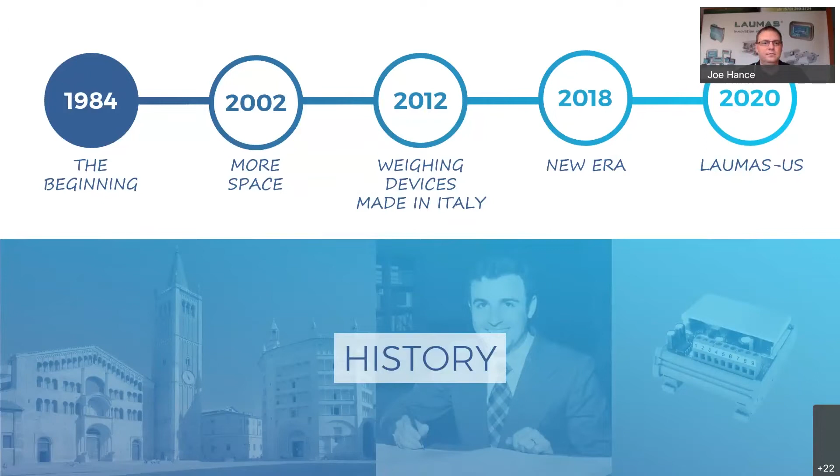In 2002, the business was moved to its current location just a few miles from Parma.

The benefits of the investments made in previous years in R&D arrived in 2012. LAUMAS completely renewed its range of products, introducing to the market new lines of very innovative, completely made in Italy weighing indicators and transmitters that immediately became a huge success.

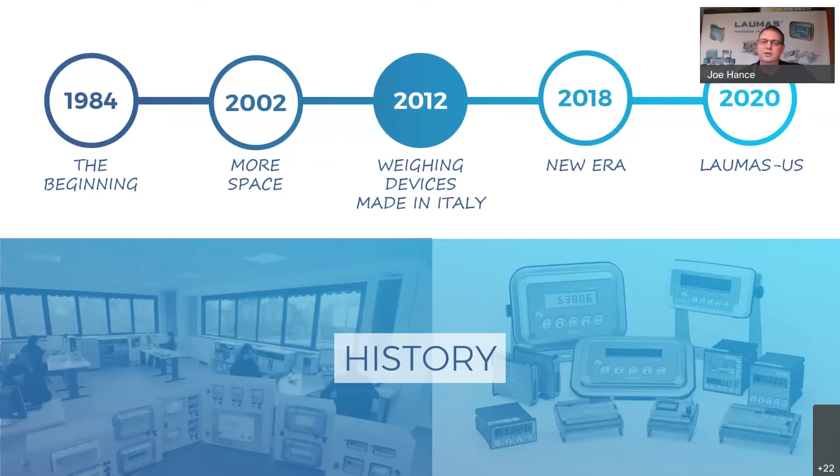In 2018, the largest expansion to date was completed. This expansion doubled the size of the facility and includes more warehouse space as well as a metrology lab.

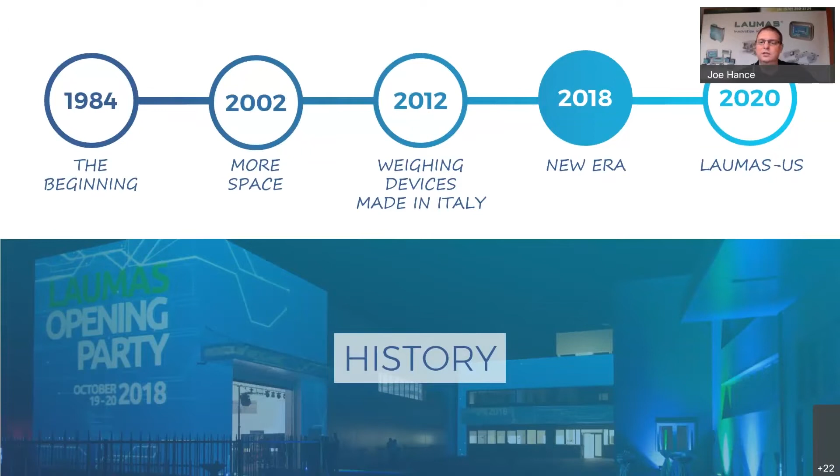The most recent news, and the purpose of this webinar, is that in 2020 LAUMAS made their physical presence in North America by creating LAUMAS U.S. The major investment in the North American market allows LAUMAS to provide timely products and services that were not possible in the past. This massive endeavor shows their commitment to LAUMAS customers in the US and Canada.

Before I get into my qualifications, I would like to take a minute and thank the entire LAUMAS team for choosing me and my team to represent them in North America. I was, and am still, honored to be selected for this role.

The reason I was chosen to lead this new venture for LAUMAS in North America by Massimo and his team is my background in our field. With over 20 years of experience in the industrial weighing sector, which involved working with people in almost every industry imaginable, I have the skills to lead our team in North America.

Some of my expertise includes vessel weighing, batching systems, crane weighing, and overload protection. I also have a lot of experience in force measurement applications.

I first became familiar with LAUMAS and their products in 2016. By this time in my career, I had spent decades working with other vendors. After testing the LAUMAS products myself and receiving excellent support from Pietro and the technical support team, I knew I had finally found a quality company to work with.

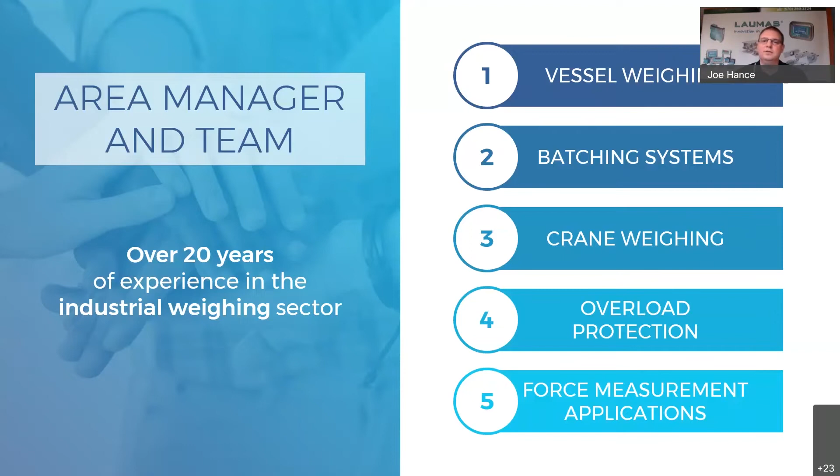We have carefully selected our North American staff with strengths in various fields. The team we've assembled in the U.S. has a vast background in sales and support.

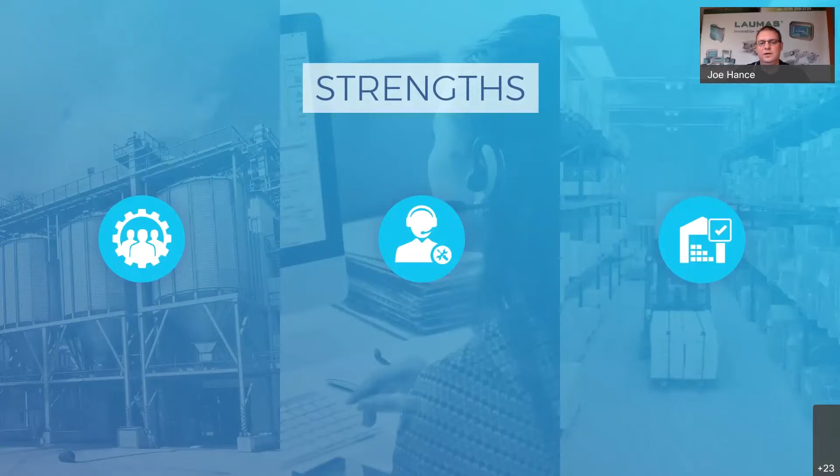Here in Pennsylvania, we can assemble pre-configured tank weighing and batching systems. Our staff performs theoretical calibrations on these systems when requested, which allows for a faster and easier setup for the system by the installer on site. We assist OEM customers with custom load cells and electronics to suit their needs, and we also offer in-house PLC and HMI programming for small automation projects.

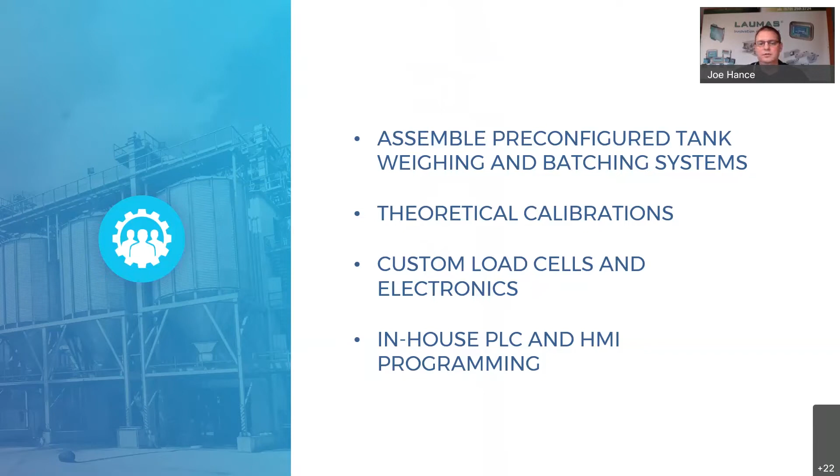The goal we have set for ourselves here in the U.S. is to make connections with partnerships with scale manufacturers and dealers, machine builders, and automation companies.

For the benefit of our North American customers, LAUMAS now has a large number of their products stocked in our U.S. facility. We have thousands of items in inventory stored in our warehouse located in Pennsylvania, and these items are replenished regularly. Having the more popular products in stock benefits our customers by shortening the lead time for delivery, and in most cases we can offer same day shipping for these in-stock items.

Another advantage for our customers is found on the LAUMAS U.S. website. Here we will find the list prices for the most popular items sold in the U.S., and these prices are in U.S. dollars. We do offer significant discounts for resellers and OEMs. We encourage you to contact us to learn more about our discount structure.

On the LAUMAS U.S. website, you'll find these products broken down into the following categories: load cells and mounts, indicators and weight transmitters, crane and platform scales, intrinsically safe weighing products, various accessories, and software to complete your scale system. Our customers can access product manuals and are able to download my favorite tool, the free Instrument Manager software. We'll talk more about this later in the presentation.

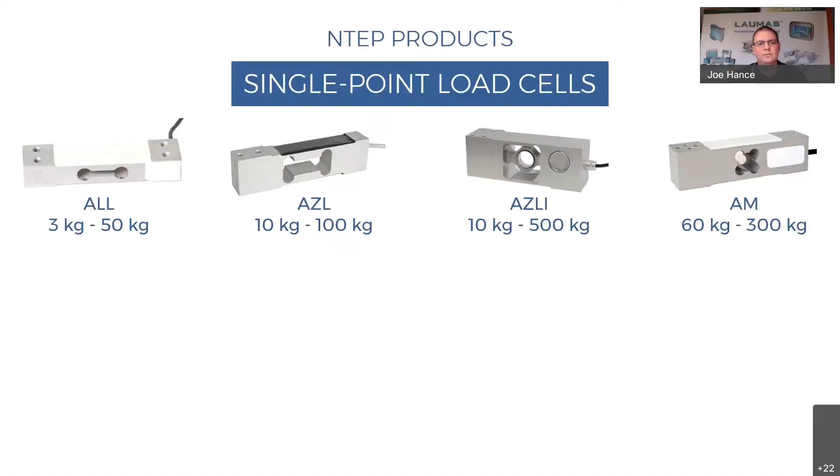As part of LAUMAS's investment in the U.S. market, we have achieved NTEP certification for many of our products. Although 95% of the applications we deal with do not require the certification, we believe this is a symbol of quality, as these products have passed intensive third-party testing.

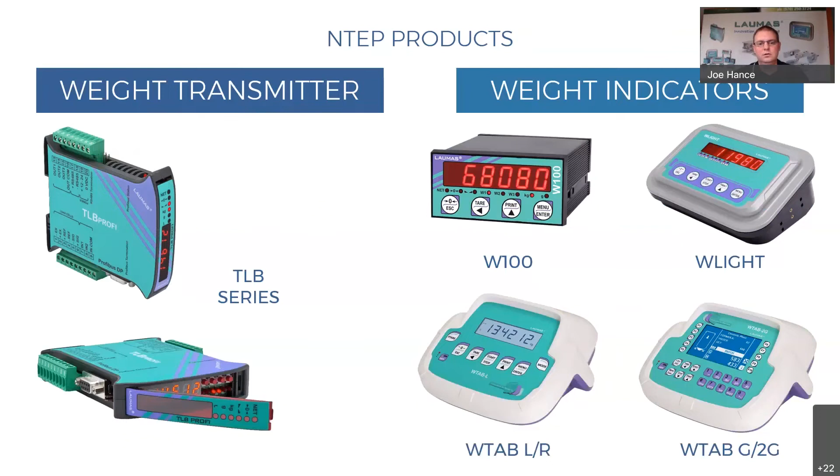We have many other legal for trade certifications for various countries and regions. We have also acquired several approvals for our products installed in hazardous areas.

For the following products shown in the next few slides, we have just recently acquired the 3A sanitary standards approval needed for many food and pharmaceutical installations. Often we are asked for products that meet the 3A requirements. Now we are able to satisfy that market.

For example, the unique design of the FLC3A load cell is not limited to use in the food industry. The price point makes it a good fit for any application, even when 3A is not required. It is easily installed on new and existing tanks, hoppers, and even conveyors.

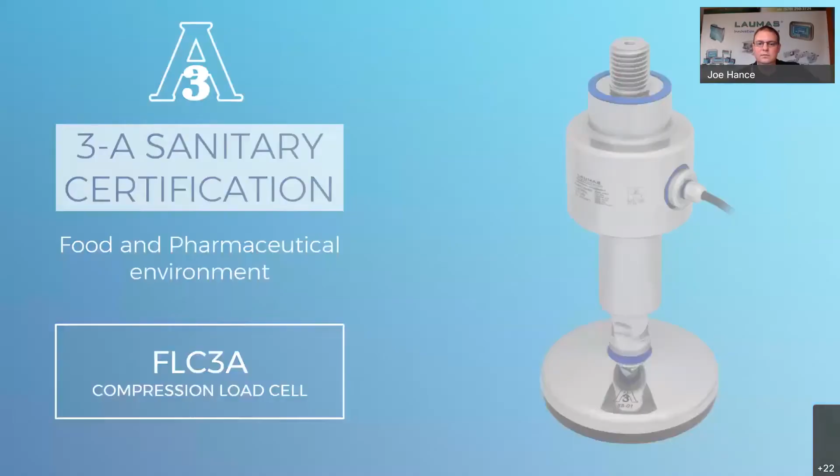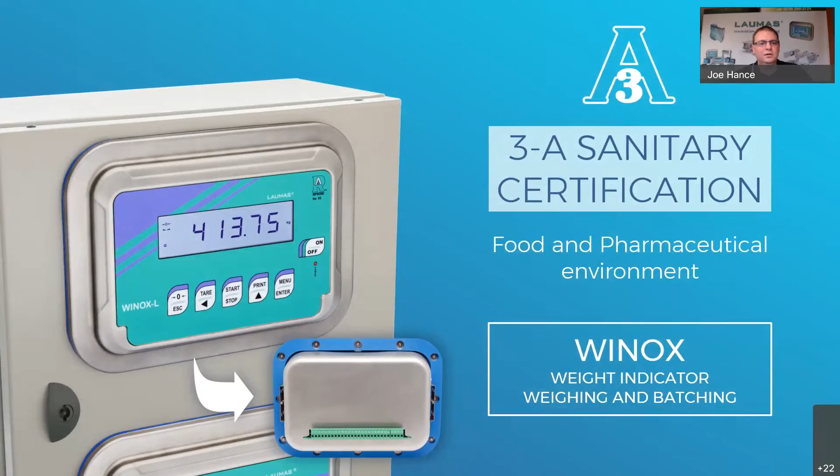We also have 3A approved versions of the popular LCB load cell digitizer, the Winox L indicator, and the TLM8 load cell transmitter.

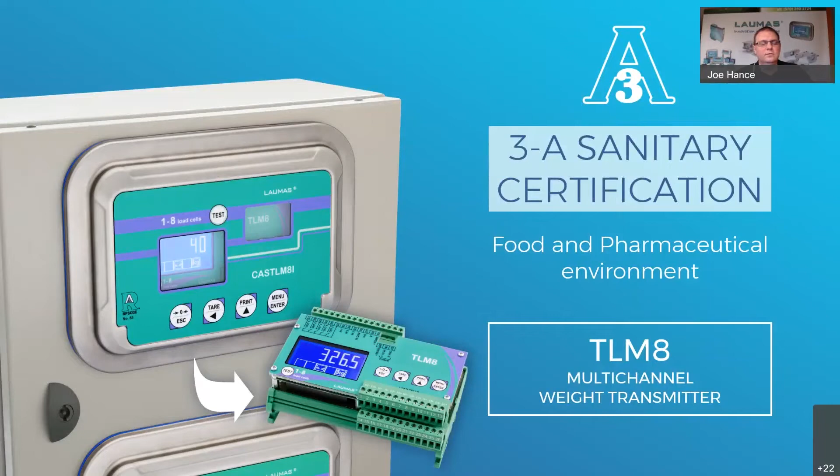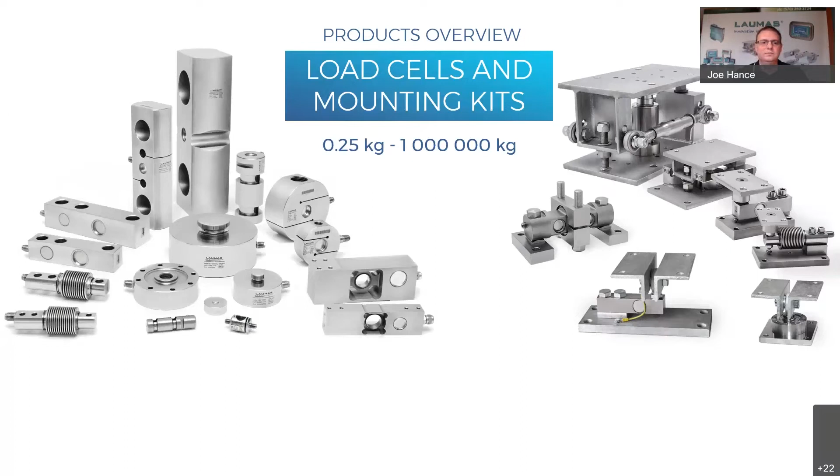We offer a full line of load cells and their dedicated mounts, with load cell capacities from 250 grams to 2 million pounds. There are standard products to satisfy most weighing requirements. For those unique applications, we can design and manufacture custom load cells such as load pins, submersible tension links, and through-hole load cells.

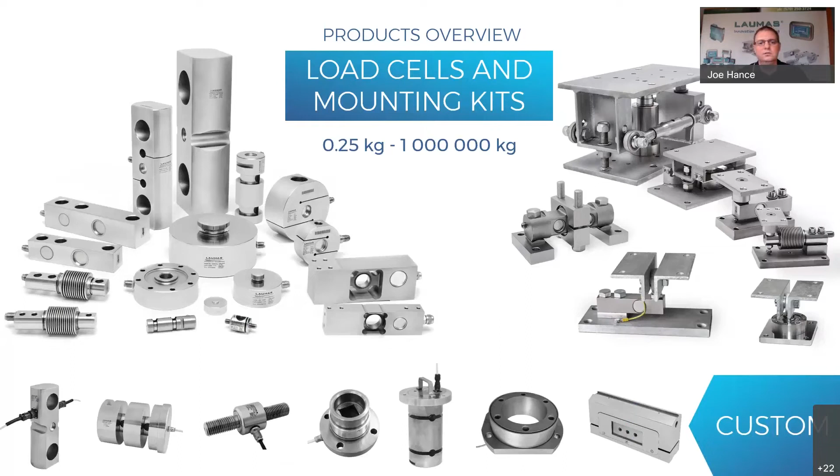Now let's look at the weighing electronics that LAUMAS offers. This, in my opinion, is where LAUMAS stands out from the competition. We offer a wide range of products from load cell amplifiers and digital transmitters, along with a complete line of weight indicators. There are single channel and multi-channel transmitters with 4 or 8 load cell inputs, which eliminates the need for a junction box.

Many of the indicators have multiple program options, such as basic weighing for simple weighing functions. For more complex weighing situations, there are modes for load, unload, and 3, 6, or 14 ingredient batching programs.

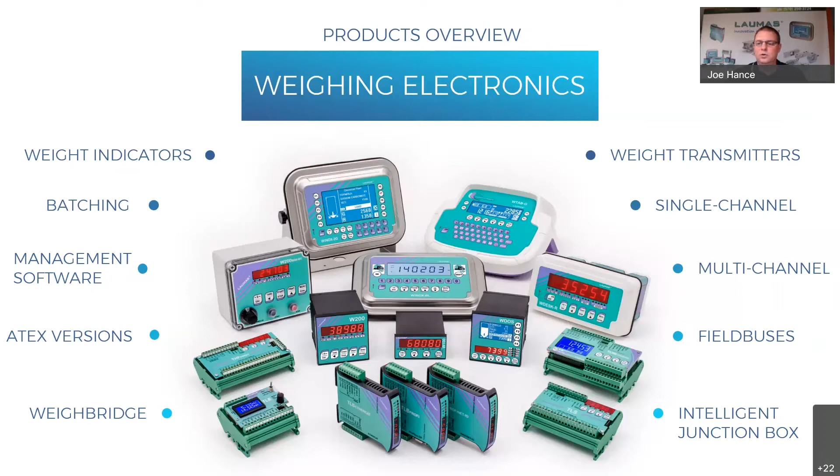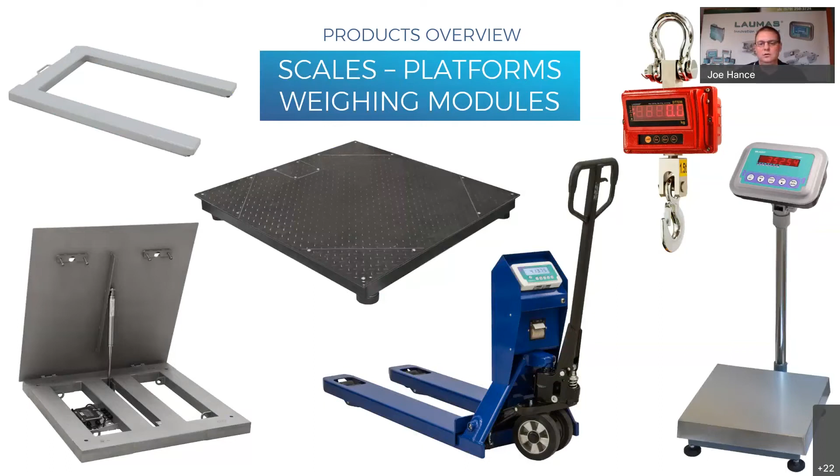Now I'd like to take a little time introducing you to a few of the products that are my personal favorites. Creating a small list of favorites to highlight was difficult, but the items that I'm going to go over with you seem to be some of the most popular.

Let's begin with my favorite tool, the Instrument Manager software. This program is provided for free and allows setup and calibration of many of our weighing indicators and transmitters. You can also perform firmware updates to the instruments and even save the configuration calibration file for later use. This feature is useful if a unit fails for some reason. It gives the user the ability to upload the saved file to a new instrument and continue on without the need for recalibrating the scale.

Next is a couple of load cells and mounting assemblies that we see a lot of. The first is the V10275 mount used with the CBL compression load cells. The key selling point and why I prefer these mounts is the ease of installation of the load cell after the mount is already in place. The jacking bolts allow easy load cell replacement if needed. Compared to the commonly used mounts for double-ended beam load cells that are difficult to replace the cell, the V10275 is much more user-friendly. This is the mount assembly I choose for medium and high capacity tank weighing systems.

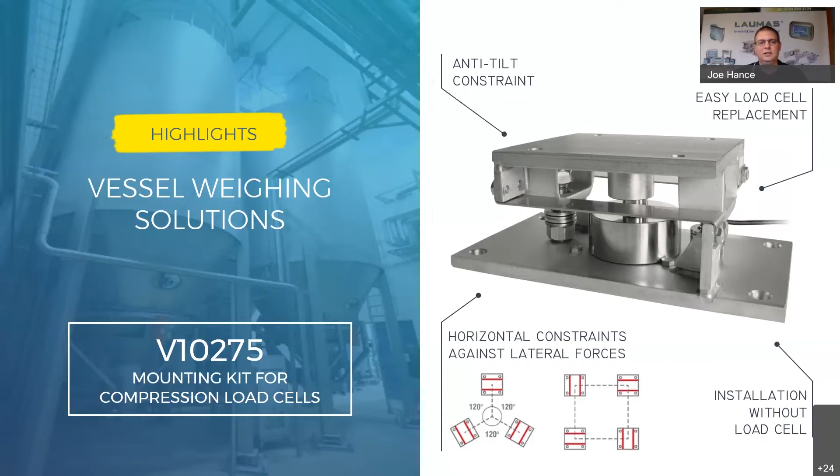Next is the TFC GP using the FCOL bellow beam load cell. The load cell is designed for washdown areas. The mount is stainless steel with rubber isolation for the top plate. This compensates for slight misalignment issues and helps with reducing the effects of vibration on the weight reading. I choose the TFC GP for small to medium vessel weighing and when weighing a small conveyor section is needed.

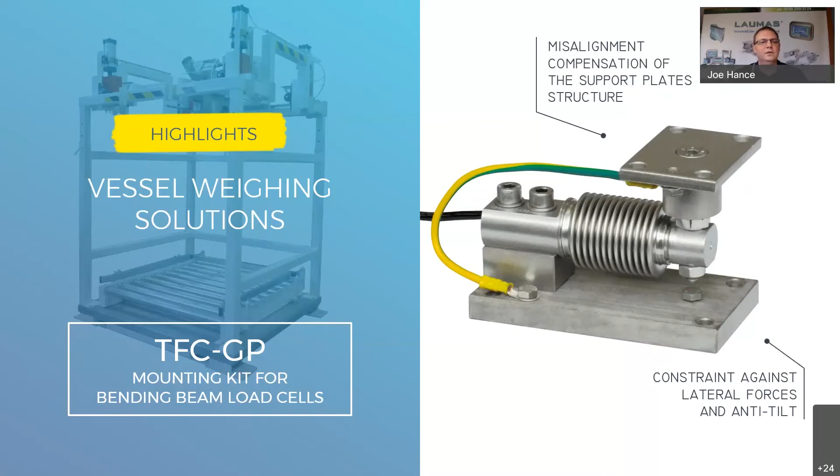This brings us to the WLIGHT weight indicator. Used for basic weighing applications, its low cost is ideal for bench and floor scales. This model can be run on batteries or AC power. This feature is what makes the WLIGHT so popular.

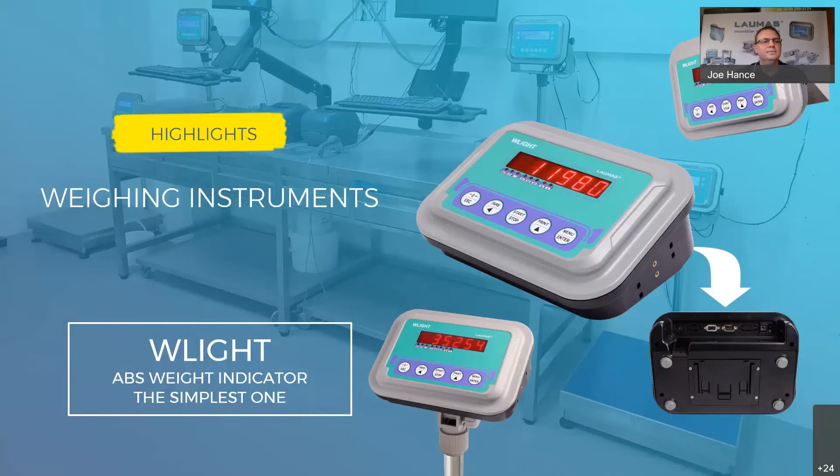Here is the WINOX2G Advanced Weight Display. The large LCD graphical display gives the operator important details about the weighing operation. Available programs include filling and dispensing to a set point, and multi-ingredient batch weighing, with versions for 3, 6, or 14 ingredient processes.

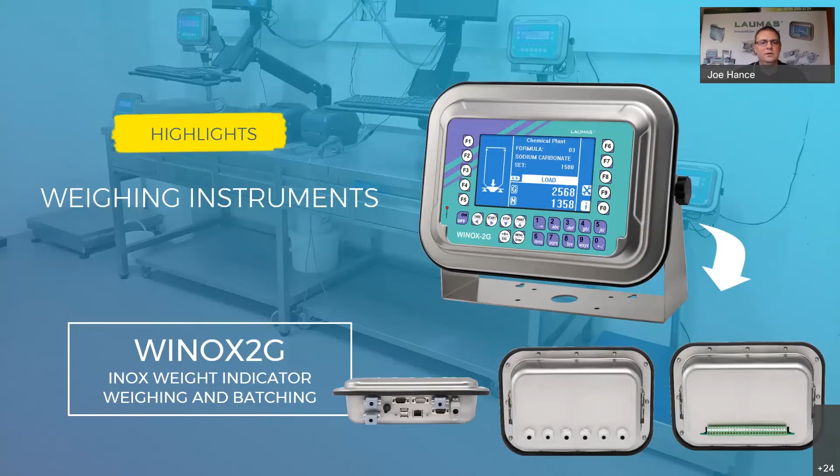Now we're on to a couple of the most used load cell transmitters. The single channel TLB is probably our best seller, and is also one of the most private label products we manufacture. It's very cost effective, making the TLB popular with OEM and system integrators when a PLC interface is required.

Next is the TLM8. It is an 8-channel weight transmitter, having all the same features as a TLB and then some. Analog output is a standard feature along with RS-485.

The test button on the front panel is my favorite feature of this model. This allows quick access for a technician to see the individual load cell's outputs. To give you an example, this information is extremely useful when installing a tank on load cells to see if the load is evenly distributed, as well as verifying the load cell's integrity while in use.

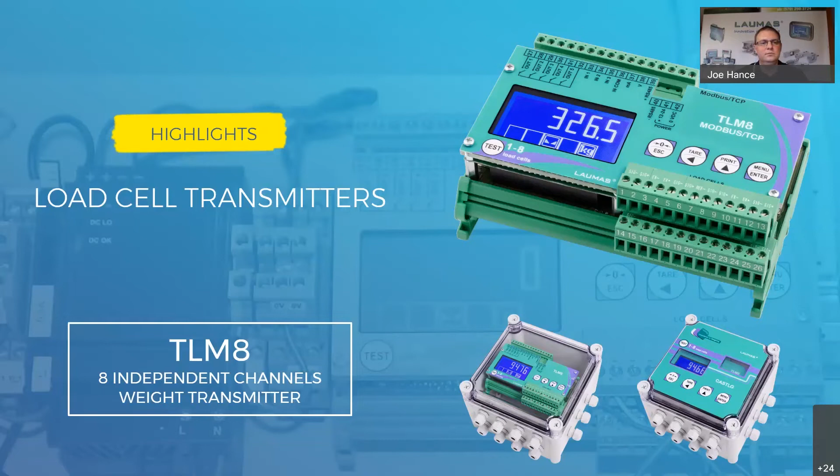Here we have the CLM8 digital load cell junction box. This is one of the items that originally piqued my interest in the LAUMAS products. The CLM8 caught my attention because of its ability to solve many difficulties that can be present when using large capacity load cells. This junction box allows the installer to input the individual load cell's millivolt per volt values to perform a theoretical equalization. This is especially useful when it is not possible to perform corner adjustments using test weights.

The CLM8 outputs serial communications not affected by longer distance home run cable lengths. When connected to one of the W series indicators, full functionality of the attached instrument is maintained.

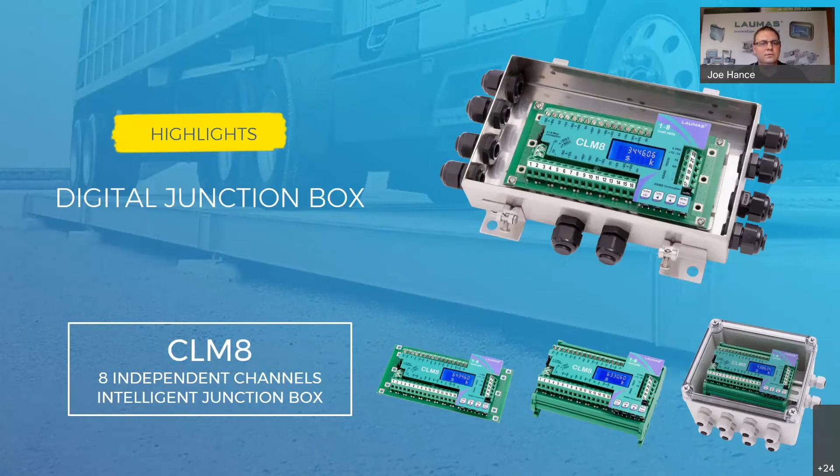Lastly, I'd like to highlight the LCB load cell digitizer and why they're a great solution for OEMs and system integrators. The transmitter is used in situations where the PLC is located far from the load cell, allowing them to send the digital signal over long distances instead of the analog load cell signal.

The LCB is set up and calibrated using free, intuitive software. I find many machine builders prefer this transmitter because of their compact size and disconnects.